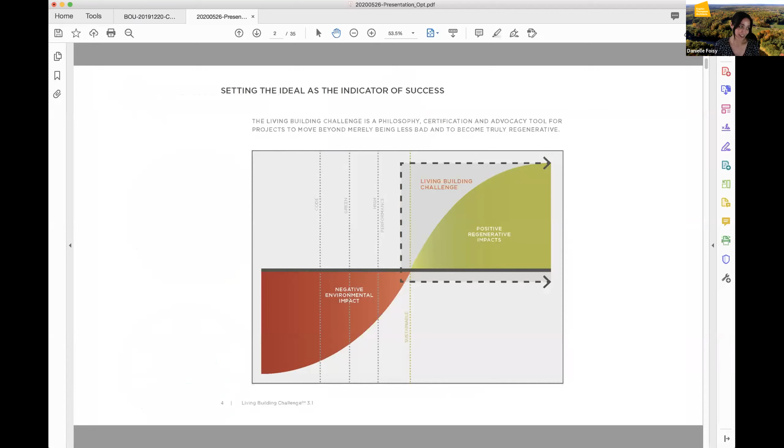The idea is to create an environment that has positive and regenerative impacts. As Drew mentioned, Living Building uses the metaphor of the flower as a goal for the built environment to achieve, since flowers are adapted to the climate, harvest their own energy, and are pretty to look at, which is a fitting metaphor for what we all want our buildings to look like.

There are 7 performance areas called petals that need to be achieved for certification, and within those, 20 imperatives. This includes 105% of the energy consumed by the buildings to be offset by on-site solar, and 100% of water needs to be managed on site, which in our case was relatively easy because the school is on a well.

The material petal requires the use of non-toxic and low impact materials, which includes no PVC and all FSC wood products, even the glue lams and structural sheathing. It's really trying to fundamentally change the materials we work with. Some of the chemicals not allowed in LBC buildings, such as PVC, are known pollutants to the environment, harm construction and factory workers, and are known human carcinogens.

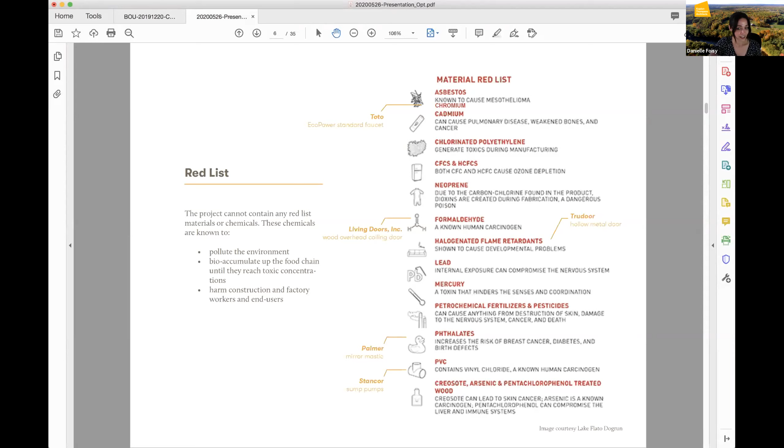Some of the petals are performance-based calculations and are a bit more objective, such as energy, whereas others are a bit more abstract, such as the health and happiness petal.

For health and happiness, the project must intentionally integrate biophilic elements into the design, meaning incorporating ideas such as what does the building sound like, what does it feel like, and how does it change through the seasons, in order to make the built environment more enjoyable to be in and less sterile, because we spend so much of our time indoors instead of outdoors.

Part of this involved an on-site charrette where the Ecology School, the design team, educators, and the farmer got together and brainstormed how to incorporate some of these elements into the design. Here's an example of some of the sketches produced that day. Our goal was to go for quantity, and even if only a few of the ideas stuck, it would be a better building because of it.

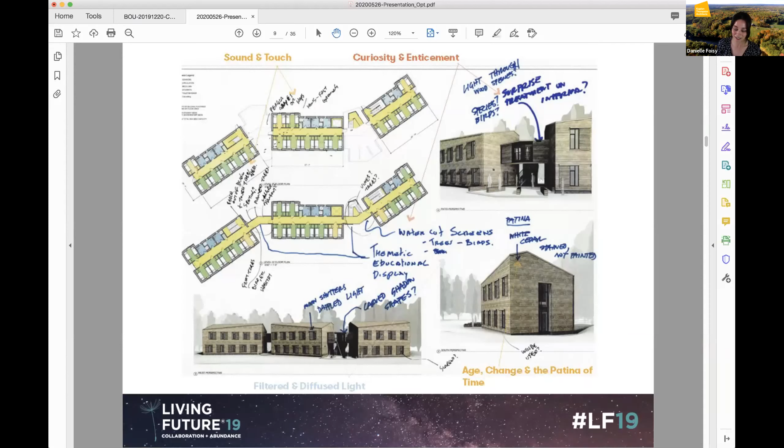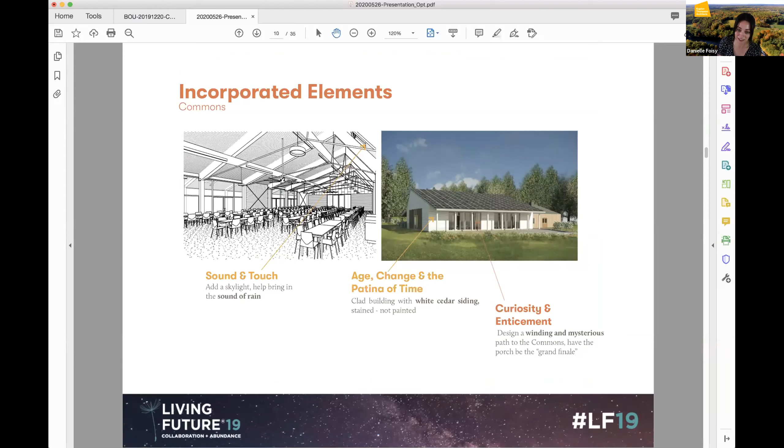One of the elements incorporated was skylights in the commons to help bring in the sound of rain, and a cutout in the overhang of the commons where you could see the solar panels on the roof above, which would allow for some filtered and diffused lighting as you walked underneath, and also showcase the energy system.

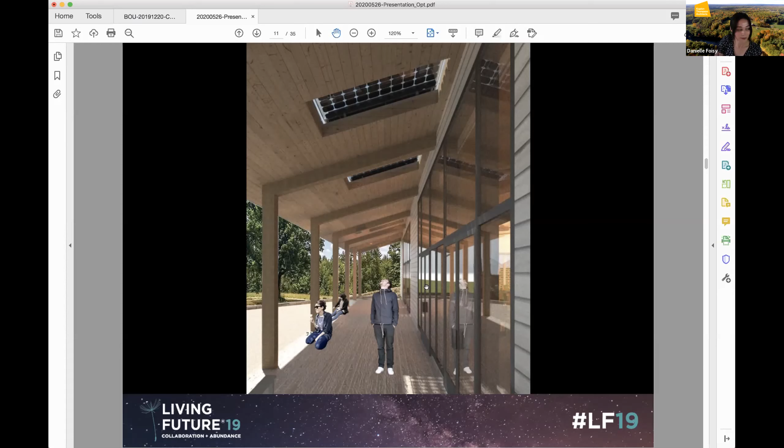Overall, the goal of Living Building is to have a holistic view of the building and construction process, to improve the quality of life not only of those who occupy the final building product, but those who work in factories that produce the building materials, those who construct with those materials, and the surrounding neighbors who benefit from having a living community as an educational hub in their neighborhood.

We want to set an example of how sustainable living can be achieved, and we're really excited that the Ecology School has taken on this tremendous task of being the first living community compliant master plan ever. It's a fabulous project to work on and have right in our backyards.

So I'll pass it off to Ryan and Chris at Scott Simons and Briburn to talk about the buildings that we're about to see on site.

But just to give an idea of where the Ecology School is, it's in Saco, along the Saco River. Their original location that they were renting was on Ferry Beach.

This is the site pre-construction. As Drew mentioned, this is the entire 100-ish acres owned by the Ecology School, of which the darker brown 96 acres is under a conservation easement with the Maine Farmland Trust. The living community boundary is restricted to the white dashed line, which is basically the developable area.

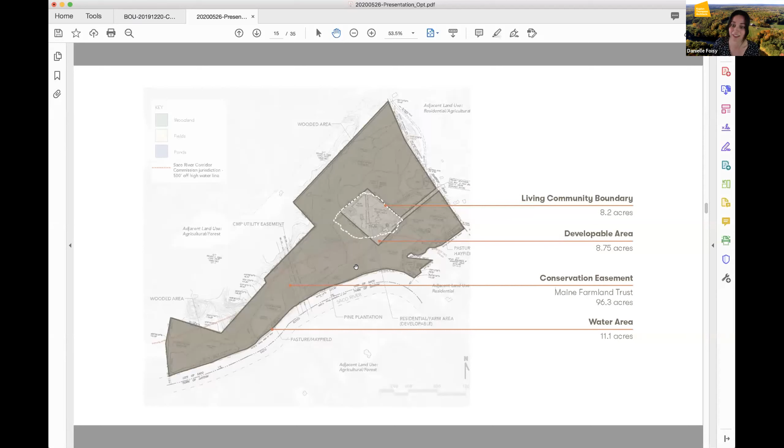And I'll let Chris and Ryan take it away about the actual design.

Yeah, Ryan, are you taking this part? Or do you have control over the slides, Ryan? I was trying to flip through the videos here. Just give me a second.

Hi everyone, Ryan Kanteres with Scott Simons Architects. This picture is actually picking up with the Richardson Associates site plan. The site plan was a collaborative team effort involving all of the design firms. I really just wanted to take a moment here to orient everyone before we go out in the field, to understand some of the decisions and directions that led to the location and siting of buildings and the utilization of the site as it was.

And this is just a sidebar that I wanted to mention.

The stated mission of Living Building Challenge being a market-changing effort, it occurred to me that this project has had some really direct aspects with that. I think we took an approach with the design of trying to source local materials to the greatest extent possible and using bio-based materials to the greatest extent possible. It actually directly led to prefabricated walls being able to be FSC sourced.

To zoom back out, the orienting piece here, you can see in the next few slides the existing buildings and the new buildings in this overall site plan, plus all the way to the left, the future supplemental residence facilities. But the largest building is the Commons building, and the segmented building is the dorms up towards the north part of the site.

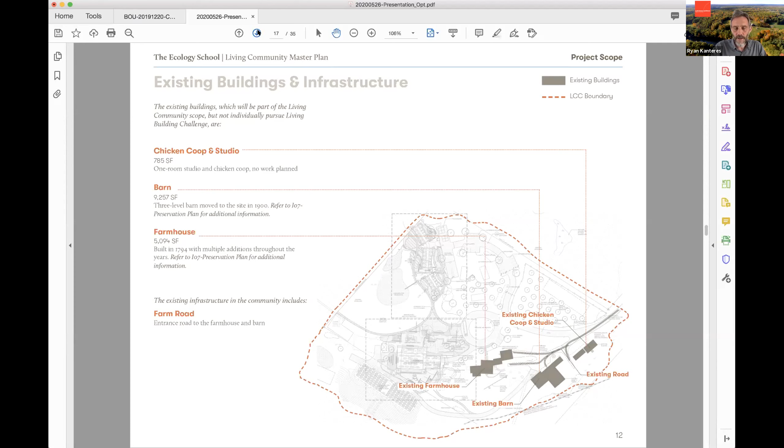That really became an identification of place and site and a design driver when we get into the commons. If we go to the next page, you'll see the new buildings highlighted. One thing that's a little hard to see here is that there's a historic wind row that runs perpendicularly almost about the middle of the boundary of this development area, which divides it from the existing historic farmyard to the new development portion of the farmyard.

And Chris, I think if you want to switch over and talk a bit about location of the dorm and the sequence of experience of the new portion, that would be terrific. Sure. Yeah, it's very similar in the process to locating the commons as you talked about. It was a real digging into the site and figuring out what worked best for the school.

When we first started thinking, all of us together, about the dorms, our immediate impulse was to work with the sun and orient ourselves perfectly south to take advantage of solar orientation. But we learned we were going to be using the commons as the big power building with solar panels, and the rest would be on an array, and the students wouldn't really occupy the buildings during the middle of the day. They'd be out in the field almost all the time.

So solar became less of a driver than the volumetric shapes of the dorms. We all collectively loved tucking those buildings into that wind row and preserving the agricultural space in front, actually having a divided form of three different buildings, which works with the program for the ecology school. They have different varying sizes of groups that come and go, and they can divide them up accordingly and easily.

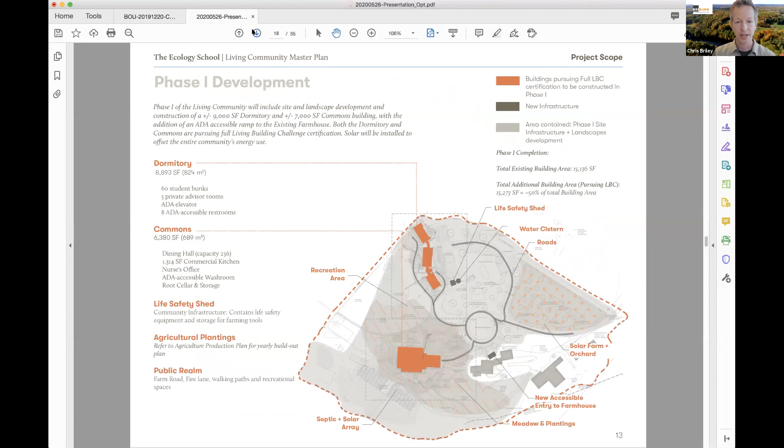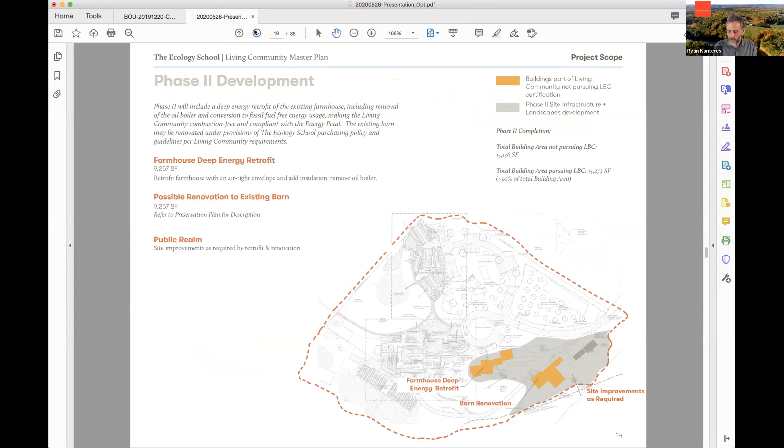That's pretty much all I have on that. Back to you, Ryan. Or are we going to the field at this point? I think that the purpose was to help orient everyone, and I just wanted to point out the direction and decision about the form of the building.

It is sort of interesting - we're working with rather traditional forms, but for the commons perspective, it's a salt box, but inverted, because the low slope, instead of shielding north wind, becomes an ideal collection location, which we'll get into in more detail.

And let me see if I can, Naomi, why don't I put it up to you really briefly, and then we can connect with John and Adam.

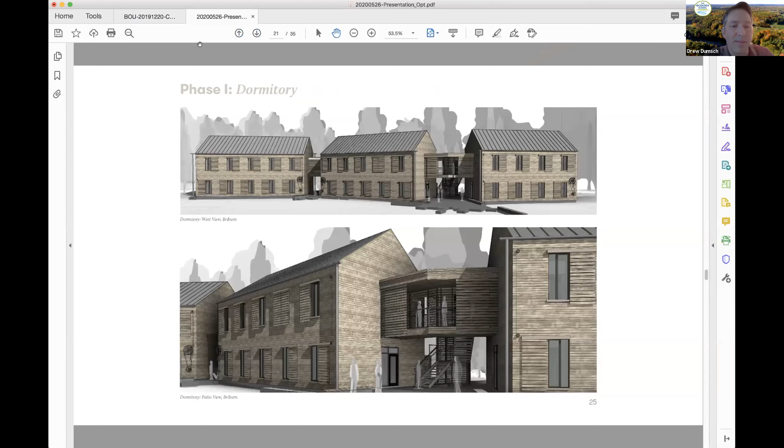I do want to just mention, in seeing those pictures of both the dorm and the dining hall—and you'll see this as Adam, Ruthie, our project manager from Zachau Construction—that with the dorm there, the windows are just these huge, massive, almost picture windows that look out. There's forest on both sides of the dorms. And then the shape of the dining commons itself references some of the shape of the farmhouse, whereas the dorm references more of the shape and the look of the barns themselves. So they fit right into the landscape.

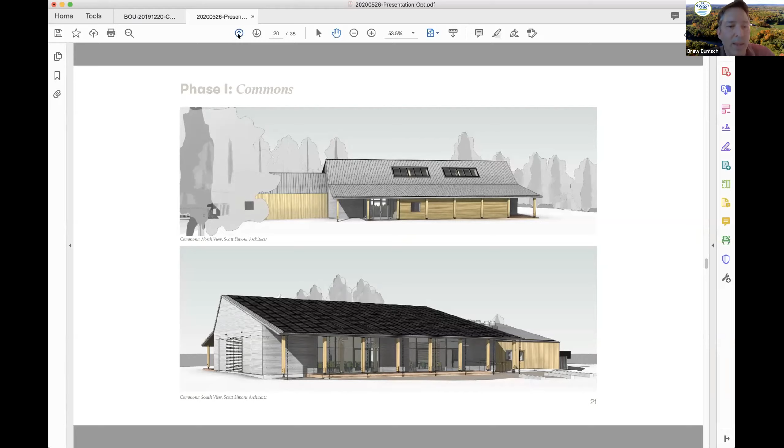We're going to start the tour with Adam standing at the top of the hill overlooking the Saco River. The farmhouse itself has an incredible porch with this amazing view where you just sit and look down on the Saco River. Our property has a half a mile of frontage on the Saco River, so the river itself is a big defining part of the property.

In fact, I remember the first time we had all the architects out—I think there were 9 or 10 architects all walking around the property with me and some of the other Ecology School staff—it may have been Jesse Thompson who mentioned that because of the topography of Riverbend Farm, you go 100 feet and you're either going up or down. It's very hilly and there's ravines. I think Jesse said you go 100 feet at Riverbend Farm and it's a whole new site. So there's so many different view sheds.

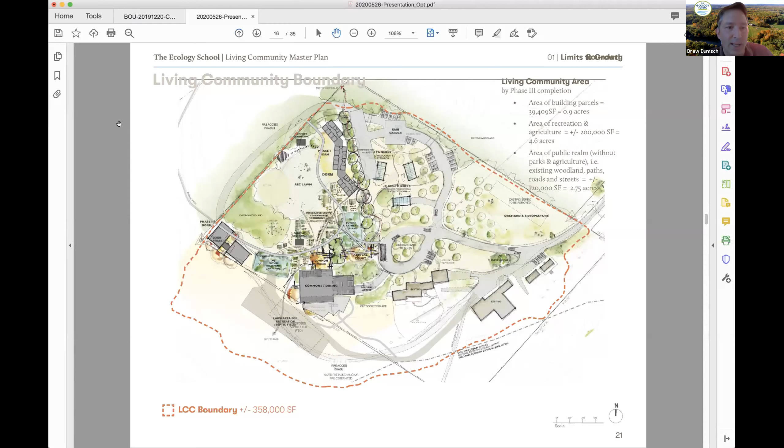I think both Briburn and Scott Simons have done such an amazing job placing those buildings. I don't know if you can point to where the dining commons and where the dorm is going to be on that overhead view. Basically, if you're looking at the farmhouse, right there is where the dining commons is going to be, and then the dorm is tucked up against those trees in the back.

We've got some incredible trees on site—right in front of the farmhouse is an old sugar maple, and we've got a white ash in front of it. So really, the architects designed right around the campus. Every tree—there's been minimal cutting of any trees on site. It's been really designing right around the farm campus itself.

If you're looking at that, there's a road more to the right of the picture that leads down to the lower production fields, which I think I mentioned our farmer was tilling just yesterday. So a lot of fields and a lot of amazing forests.

Well Drew, thank you. I think it looks like they're ready out on site, so why don't we swap the view over to Adam out on site.

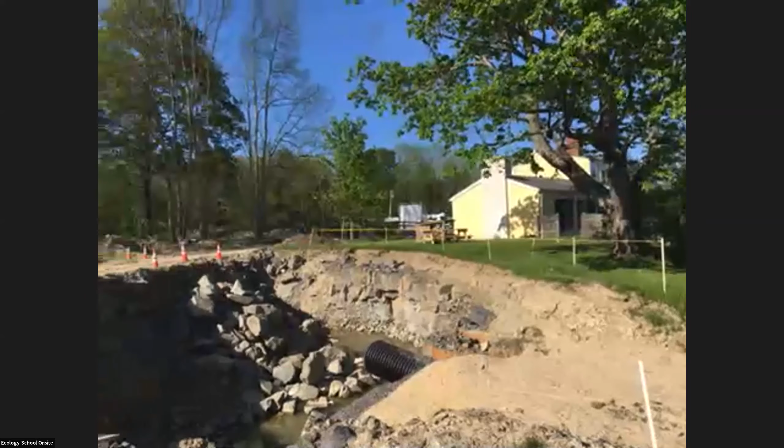As we come up here, you can see one of the petals is water resources, having a net positive amount of water, recharging the system, and this is part of that process. So it's a giant retention pond. We over-excavate it, that gets filled with a number of different substrates, soils and drainage materials, then capped with specific landscape plantings that allow water to infiltrate through and track through the whole site, essentially recharging the groundwater.

And then this is the old farmhouse, or part of it. You might be able to see Drew in there — he could stick his hand out the window and wave.

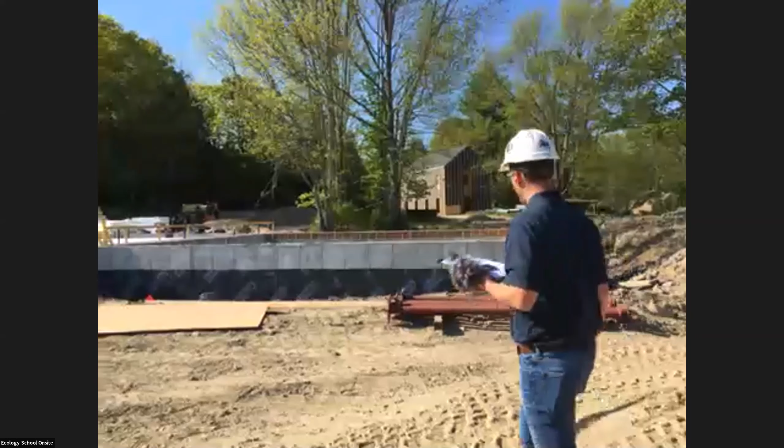Over here is the commons. We're a little further behind here. You can see the dorms in the background. We've got the kitchen here, and we've got a waterproof membrane. One of the interesting aspects of the living building challenge with all the material selections is we have lots of products that are compliant and a lot that aren't. This process is figuring out what we can use — essentially what the best, most environmentally friendly product is.

With this, anything that's sticky is usually a challenge. There's a lot of stickiness in this bituthene, the Grace product, from the primers to the different adhesives and sealants, to that specific membrane, as well as the drainage board. Some of those are better than others, and some manufacturers have better products than others, not necessarily their full suite. So it's been a challenge navigating that, where one manufacturer has one item that's good and another has another that's good, but they don't mix together. Anyway, we've landed with the Grace product here.

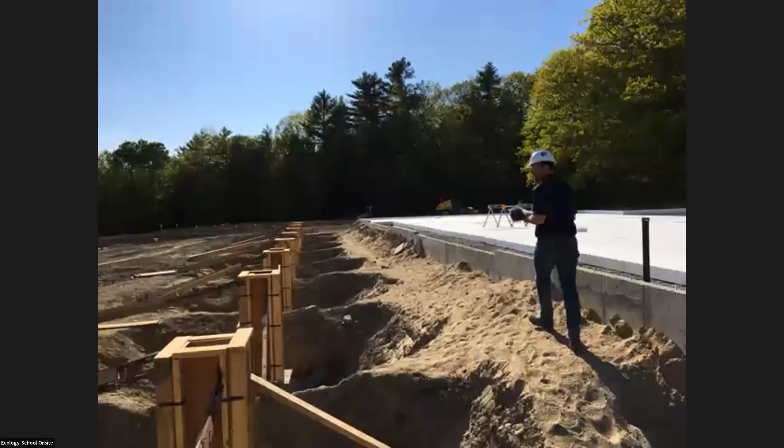If we wander a little further afield, you can see what will be the porch to the commons. This has a great view of the Saco River — I don't know if you can see it in this footage. You'll be able to see the yellow iron, but maybe not the actual river.

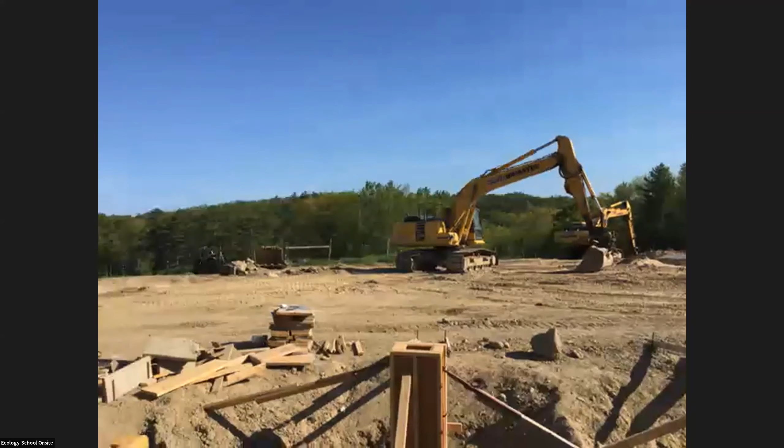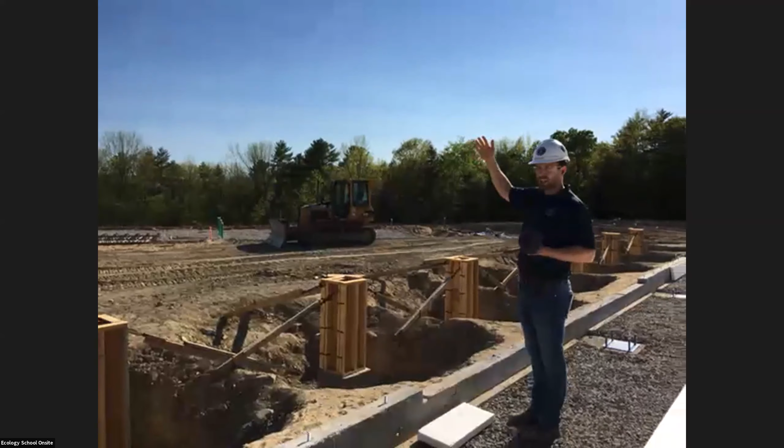But the intention here is you'll be able to sit out, have a coffee or breakfast or any of your meals overlooking the water. And as Danielle said, there are a few punches in the porch roof, so you'll see the solar panels, and they'll be translucent, so you can look up through there.

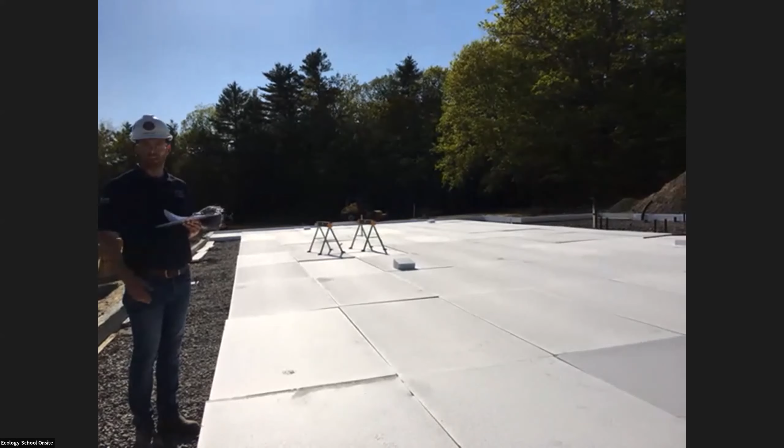In the commons themselves, we're getting ready to do the slab, so this is part of the underslab insulation. We're using EPS, which still has some challenges from an environmental perspective, but it's much, much better than the blue board or pink board you're normally used to — the XPS or other products which have really bad blowing agents in them.

One of the options we originally had was Glavel, which was pretty cost prohibitive — you're shipping it a long way. This ended up being the better product.

Could you explain what Glavel is? Glavel is like a foam glass kind of gravel — a foam glass material that's used instead of other insulation. Obviously the underslab or foundation insulation gets wet, so you need something that will stand up to those rigors. So you're a little limited until they come up with a compressed wood fiber board that can't rot underground.

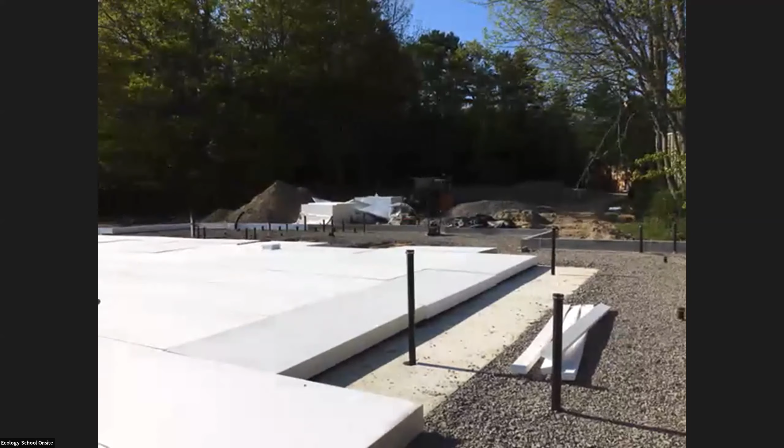So this stretches across — we've got a few spread footers, that's what's going in here. You can start to see some little sprinklings of cast iron pipe. So this would be the serving area, and the kitchen's behind us.

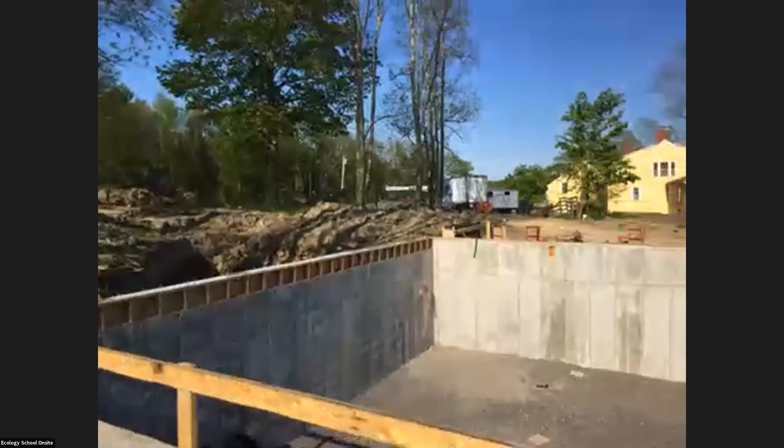And then the commons bathroom is over here.

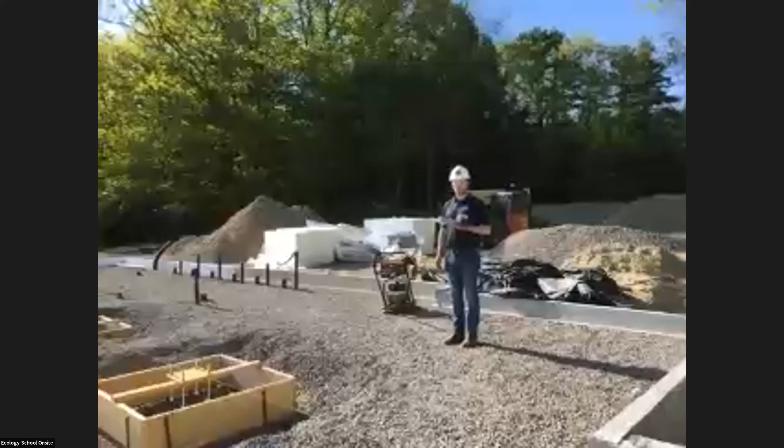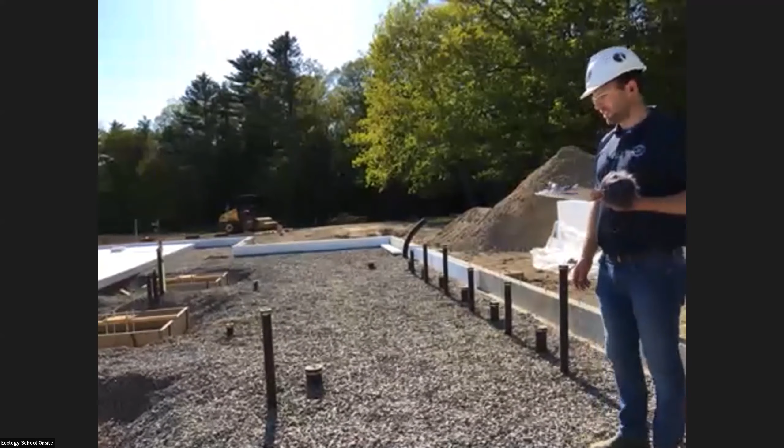One of the materials that's really toxic in production is PVC, so we can't use any PVC on site. We've got cast iron for all the drain and waste pipe work instead. It's a little more challenging to put in, but one benefit is you won't hear any noise in the walls—no dripping sound hitting the pipe like you get with PVC. It has really good sound deadening properties, so it's one of those unique spin-offs that has a net positive for the project.

And if we spin up here, you can see the dorms coming into view.

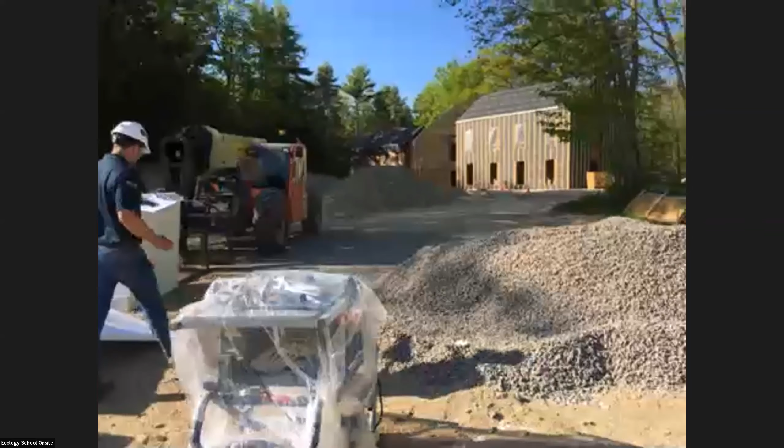One of the other major challenges on this project is recycling and waste mitigation as part of the Living Building Challenge process. I think 99% of all the waste we produce has to be recycled—only 1% can actually go into the waste stream. To put that in perspective, if we get one of the big 30-yard dumpsters, and we have 100 on this project, only one of those can be all the various plastic waste, packaging and other stuff, which is very challenging. So the designers have eliminated a lot of that problem by not selecting carpets or other products that are inherently more wasteful.

We're left with wood, and that can be recycled, so we send that off—it essentially gets burned at a biomass facility. Ceiling tiles can get recycled, drywall can get recycled, a lot of these other products can get recycled. All the steel and wiring too, and some gets reused—some things we've salvaged from other projects.

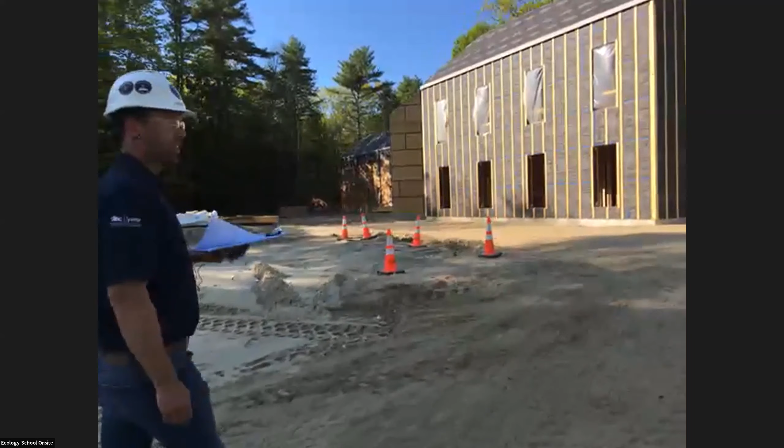So we've got a shed for the agricultural building that we bought completely used—it was an old horse barn. That's one of the other benefits, there's a lot of savings in that. It would be more expensive for us to build it, and it's a beautiful little shed.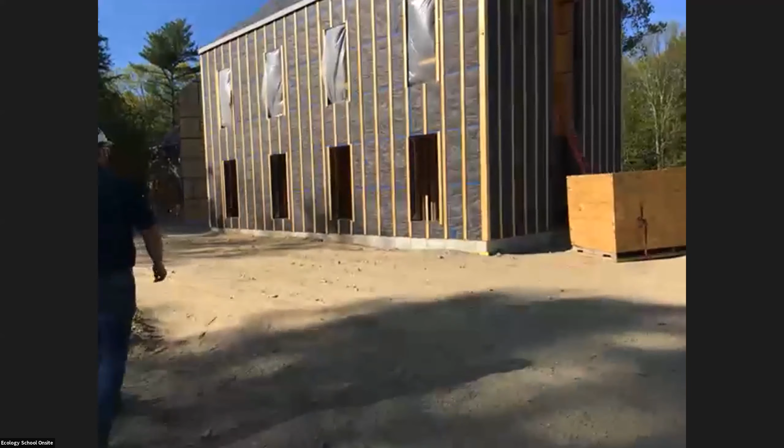As we come up onto this building, I think Oliver's on the line, so he can give you a bit more technical information on this.

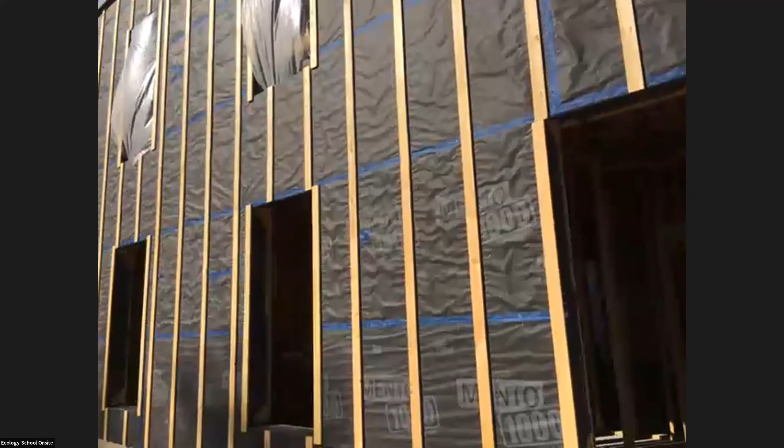WRB—so we've got the Mento wrap with Tescon Vana tape, and on the exterior barrier it provides a really fantastic vapor-open system. It allows all the vapor to escape while eliminating any water ingress into the building. And then we've also got it strapped, so all the siding will sit off the wall, providing a ventilation channel behind it so it has a chance to dry out.

Adam, do you want to let Oliver give a little bit of background about this material? Sure.

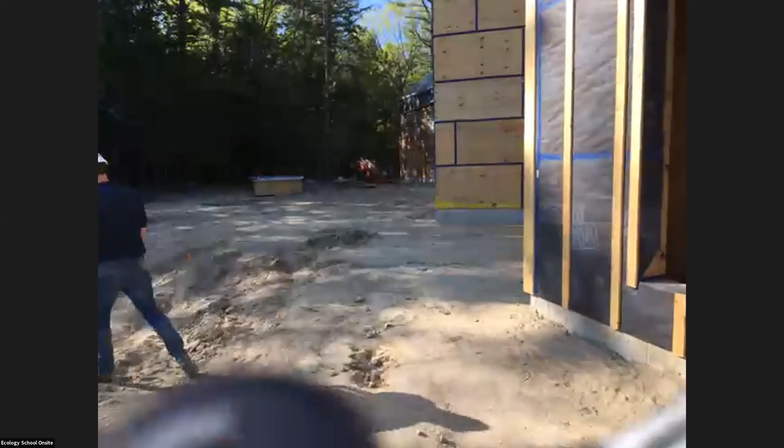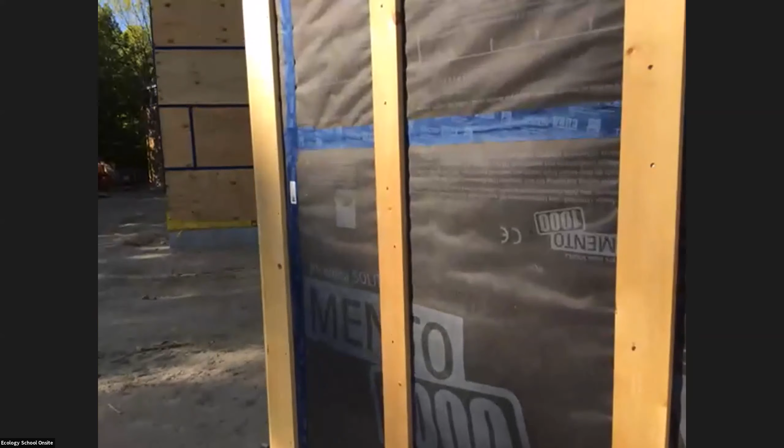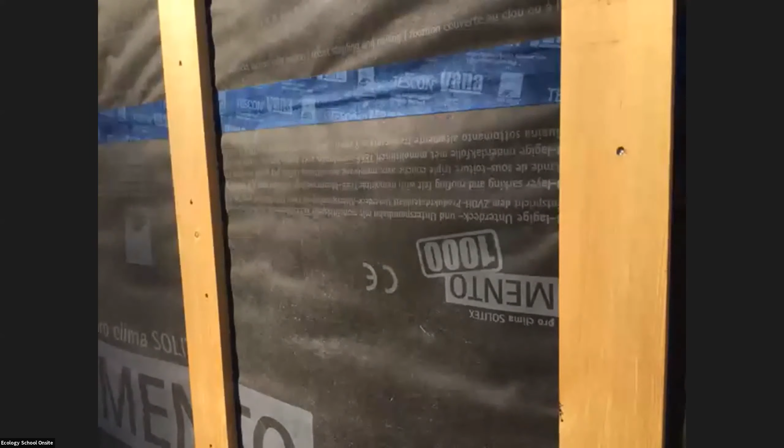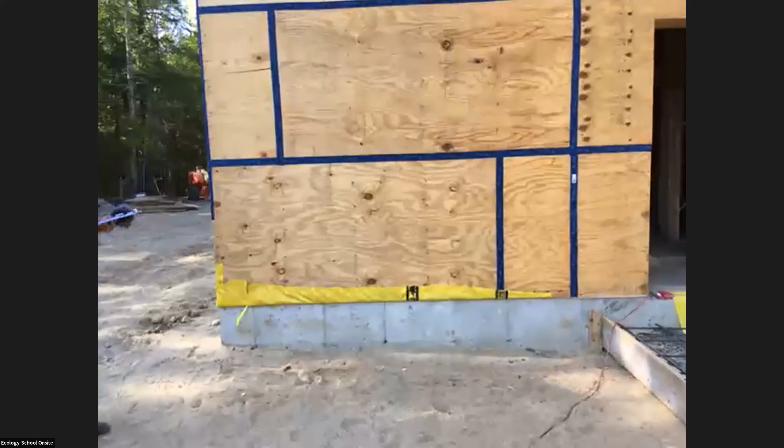Yeah, there's not much to say here at this point—he said it well. Mento 1000 on the outside as the weather barrier, and it's not a conventional one. It's a very high performance weather barrier, a monolithic membrane, not microporous, and that gives this project really high performance weather protection, in addition to a very high level of air tightness and very reliable vapor control. So you get that energy efficiency, the durability, and of course it's going to play a big role in the health and comfort of the buildings as well.

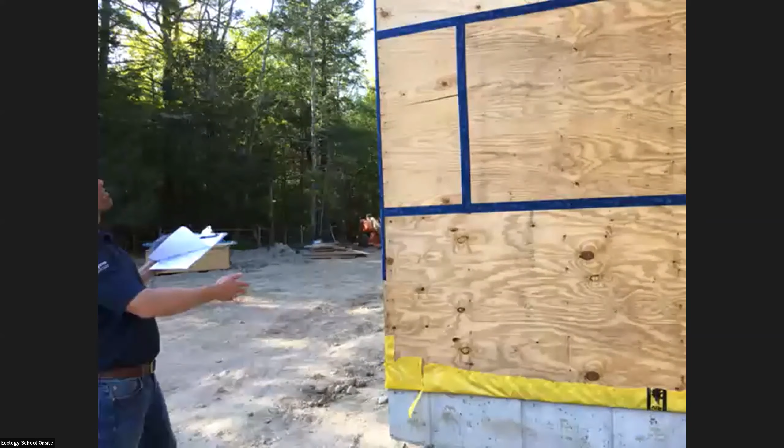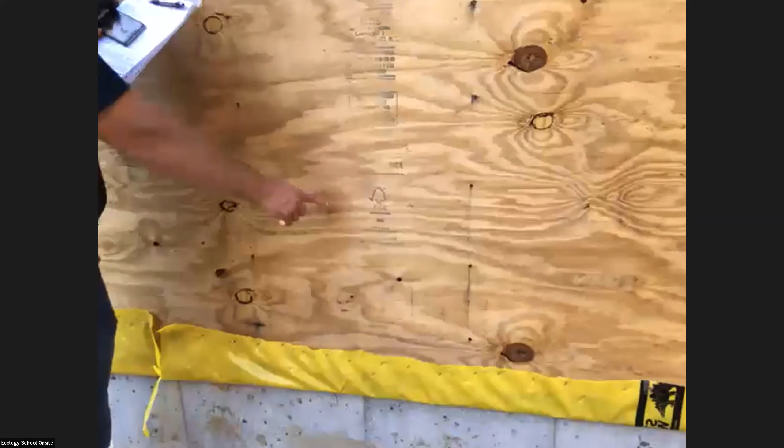Part of our sequence here is we've got very simple structures, so they're very easy to wrap, insulate, and provide that complete barrier. Underneath there's Stego, essentially a plastic wrap that goes under the entire slab. It wraps up onto the side of the framing, and this gets taped to the plywood, which again you can see is FSC. Then all the seams of the plywood get taped, and we still put the Mento wrap on top of that and tape all of those seams too. This gets wrapped up onto the roof, and then the whole roof gets wrapped as well, so there are multiple layers of that air barrier and vapor control.

So we can roll inside and have a look at some of these wall assemblies.

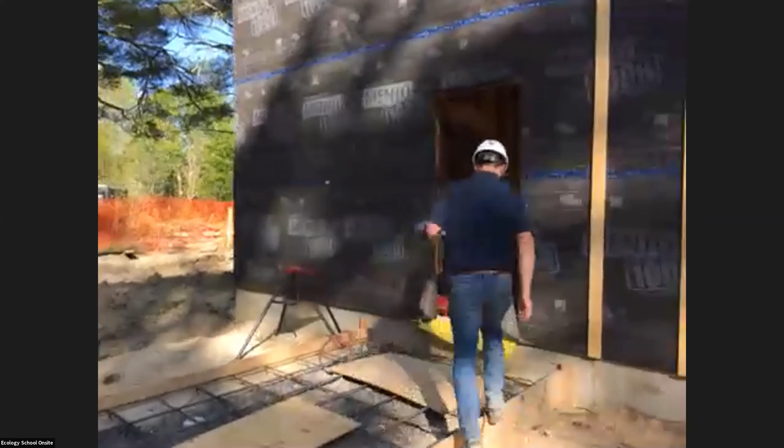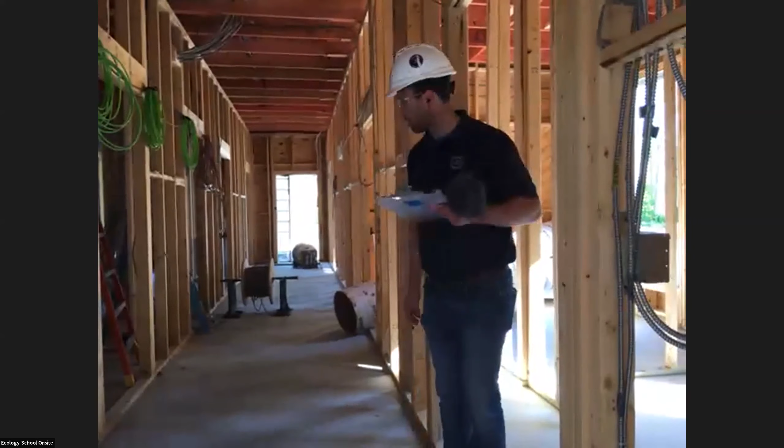So this is one of the dorm modules. You've got a central common corridor, with bathrooms on this side, and bunk rooms on each side. Right when you walk in, there's a walk-off mat, which is what this little depression is. We'll pop these 2x out and eventually put that in. This floor will be the finished floor.

On the second floor, it gets a 2-inch concrete topping as well. And interestingly, the LBC has its challenges as well as its perks. One being that we struggle to get a lot of FSC products. They don't make a lot of finished flooring that's reasonably priced, and a number of other things that are just hard to source.

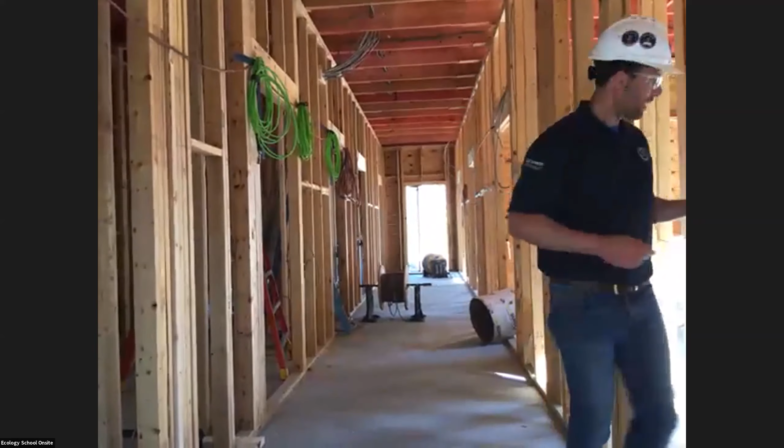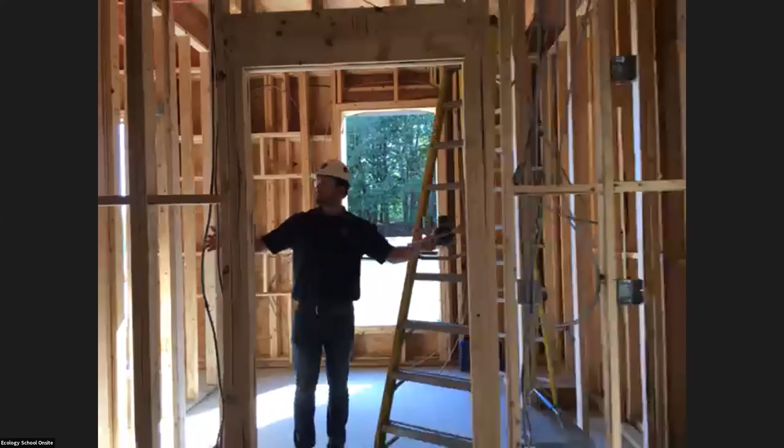In the actual dorm room, we've got two closets on each side, and then you walk in and there'll be 2 bunk beds on each end. And this was the window Drew was talking about. These giant windows let a lot of light in, with nice big tall ceilings.

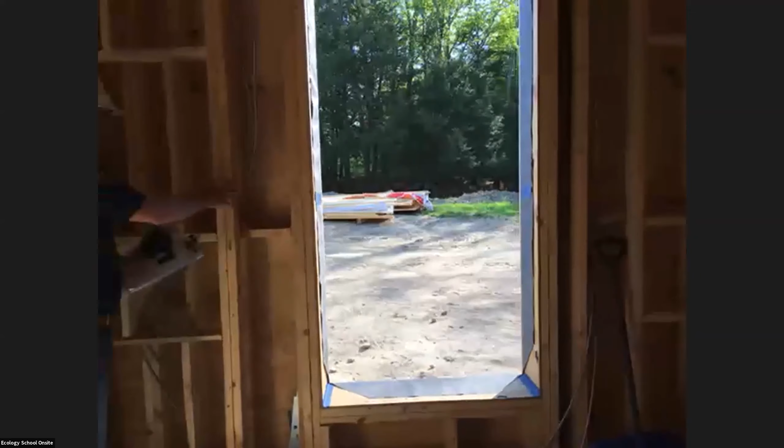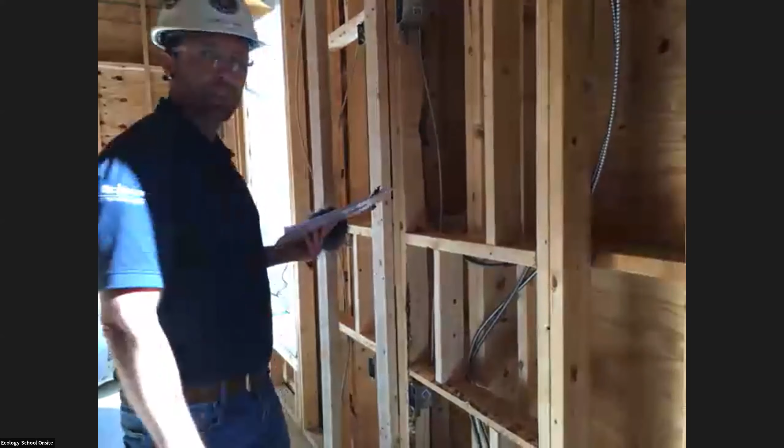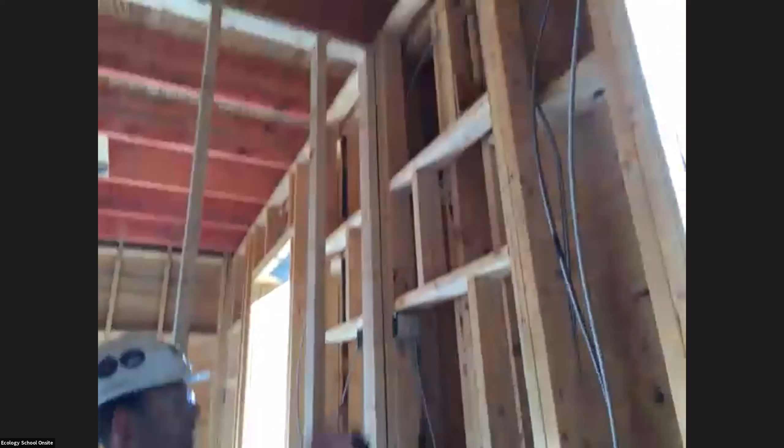The whole project has a double wall assembly, with an exterior 2x6 wall and an interior 2x4 wall. These ones in the dorms have little blockouts too - we're going to have some recessed shelving in there. There'll be one bed here where you put your phone, a book, your glasses, and then the second bunk will be up here, and there's another one. These will get filled with blown cellulose.

Another 475 product will be Intello Plus, applied to the inside, which is another reinforced vapor barrier so they can fill the cavity with blown cellulose.

In here we can get a little better view of some of the plumbing. Again, the same cast iron that goes all the way up through.

So I believe to date we've submitted about 1,000 products to Kaplan Thompson and the materials researcher, and I probably have about 600 that are approved. So this whole iterative material selection process is pretty time consuming.

There's a lot of products that either definitely don't make the standard, maybe some that you think make the standard and then don't, and others where there's declare statements and other elements that are previously approved, so you know they comply. That's been quite a challenge on the construction side - really dialing in what is and isn't compliant and what we can and can't use. Sometimes it's been right down to the wire with certain things, and others we've had to go beyond and outside the scope of what was originally planned in sourcing something that everyone thought may have been approved.

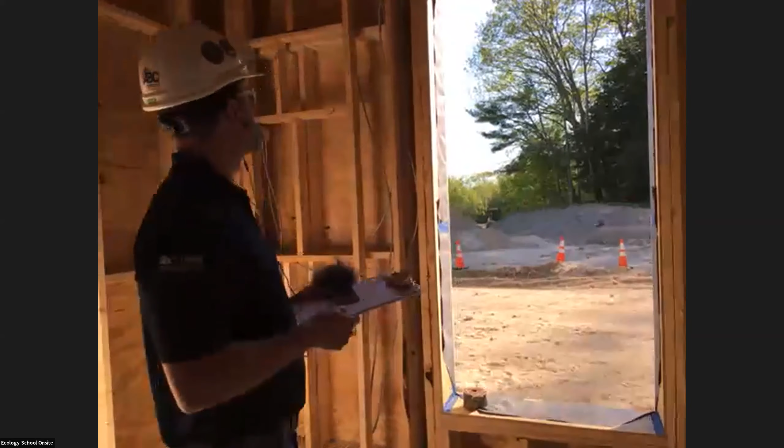Hey Adam, could I just talk a little bit about the choices we made in the wall panels? It ended up being kind of how we pandemic-proofed some of our supply chain. Initially, the wall panels bid looked like it might be going to an out of state firm, but I had already been meeting with Kevin Hancock and really liked the idea of sourcing within state. Part of the challenge was at that point, the Hancock panel shop wasn't comfortable with being able to fully execute the design. That showed where the design team was nimble enough to make just a few tweaks on the wall panel assembly, and then Hancock was comfortable with it. And actually the bid came in much lower.

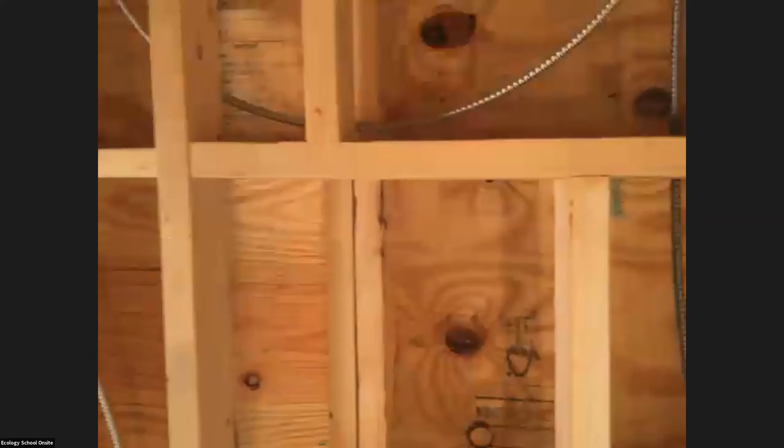Now we've got wall panels sourced with FSC Maine wood. You were saying, Adam, that you're familiar with some projects where you're waiting on materials from the West Coast or even China or Europe. Here we were waiting on panels from just a few towns over. That really was a great example of how the Living Building Challenge and its focus on sourcing local materials made it somewhat pandemic-proof in terms of supply chain.

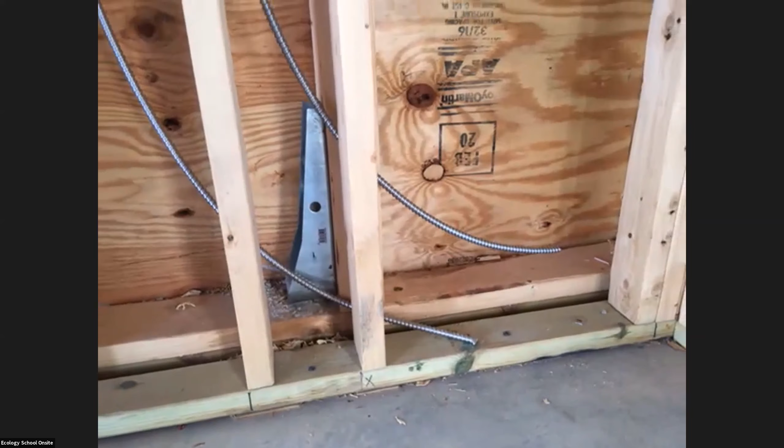Expanding on that a little, it also simplified the whole process because Hancock wasn't able to do some of the really complicated wall assemblies. They basically showed up with two different walls, like the exterior and the interior, and we just placed both of those, as opposed to the whole thing being a sandwich that shows up that you're then struggling to get in and install some of these structural elements. So on the construction side, it helped us, and as Drew mentioned, it supported a local company, and because they were able to supply everything really quickly, it also pandemic-proofed this project to that degree.

Adam, I wonder if we could maybe take a couple questions. There's a couple questions that have come up. I think Meredith has her eye on those that are specific to the site. Yeah, certainly. Or Meredith, go ahead.

So one of the attendees, there's clearly some passive house people, and they want to know, as you talked about many air barriers, which is your primary air barrier? Do you have a primary air barrier? I could answer that if you wanted. Go ahead.

We've got the opportunity to have many air barriers. You can have as many as you want, and each one is better and better because we're trying to keep the envelope tight, but controlling the moisture migration through the assembly is the important part. Adam pointed out that on the inside is going to get an Intello wrap, which is a vapor variable profile, and Oliver could probably talk your ear off about that too if you want.

Essentially, what it's going to do is allow water vapor—when it gets wet, it's going to seal up and keep that humidity from entering the assembly, and then when it dries, it's going to open up and allow it to escape if it did get inside. So that's our vapor control layer.

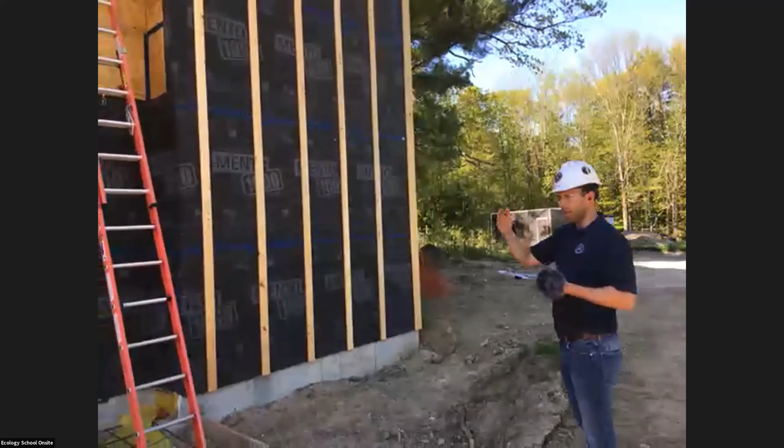With concrete, the additives—the admixtures—get really technical, and there's some that have some really nasty stuff in them and some that don't. I don't actually recall the specific products we used for that, but even things along the lines of the form oil that prevents the concrete from sticking to the formwork, we use an orange-based product.

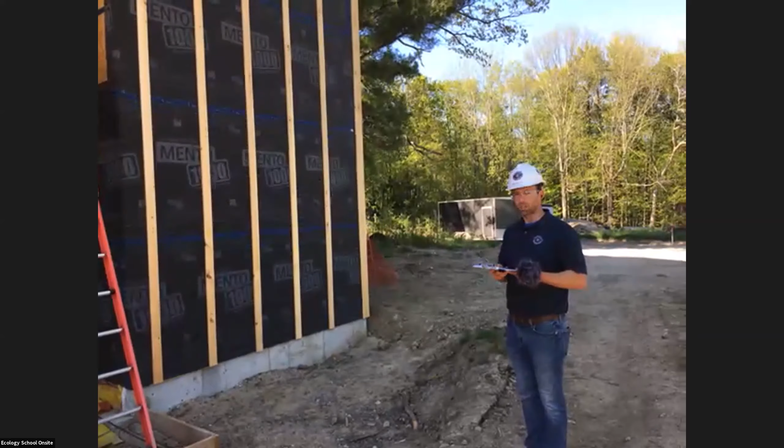And the other sticky stuff—all the sealants, all the glues—like Titebond wood glue is okay, but there are other construction adhesives that aren't. All of what we pointed out in the Commons basement, that Grace product you use to waterproof something, there's just things that off-gas and are generally not compliant.

Of all the different products out there, there's a very, very small percentage that we can use. So part of the challenge is usually figuring out what those are. Right now, the Living Building Challenge is still relatively new—I think there might be about 25 different projects in the world that have their certification.

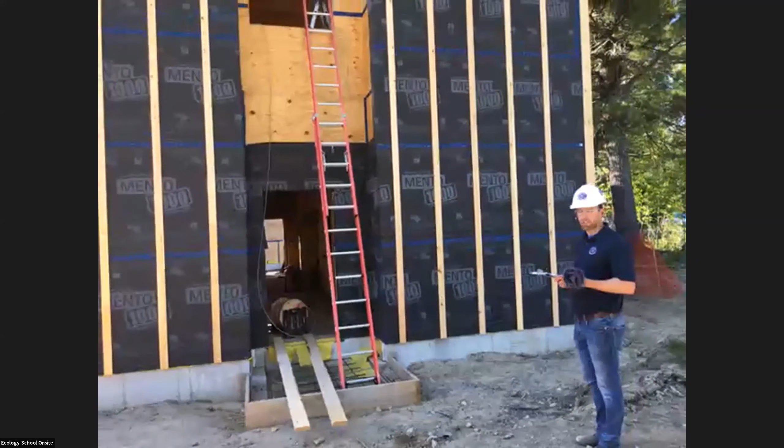So this database, which isn't open source but is somewhat available, doesn't have a lot of things on it, just by nature of only having 25 other projects. So one of the big cost drivers at this stage in the LBC certification is just going through and vetting all of these different products.

If I might add one comment: with Proclima products that we represent at 475, you're not having to make a choice between high performance and health—you can have both. And with the Tescon Vana tape, which performs as exceptionally airtight and has exceptional durability, it is also red list free, and has actually achieved the Declare label. That makes it easy to achieve high performance for these Living Building Challenge projects.

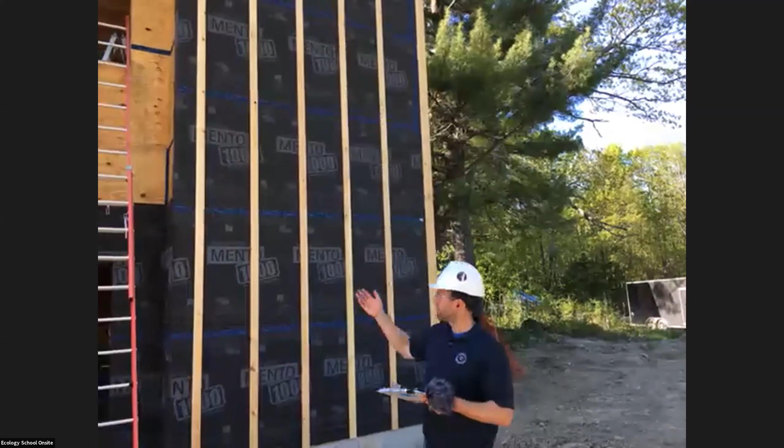Thanks, Oliver. You'll notice a lot of buildings now have a greener hue to the plywood, and we can't use that because it does not comply. So that's where a lot of 475 products are. They're great to work with, great for the environment, great for the people using them, so they're not slathering themselves in some of these chemicals.

So do we have any more questions? There's been a question about how the subcontractors have responded to the living building challenge. That's a good one, from Kathleen Smith at International Living Future Institute.

Great question, Kathleen. The contractors have been really good. I think it's kind of a self-fulfilling sequence, because the contractors that aren't good, or that we struggle with and who don't do their submittals or their legwork and aren't good on the paperwork side, they didn't want anything to do with this project, and we didn't want them to have anything to do with it either. So what we're left with is some of the best subcontractors in our pool, and they have the capability to manage this, the patience to go through a lot of these iterations when we send constant feedback that says, you can't use that product, find a different one, think outside the box, what can we do for this? So they've been really great.

By and large, they're all really interested in it and really appreciate the process and the meaning behind it. I think the big selling point that works for everyone is that the construction industry is both very wasteful and very toxic, with all the stuff we're exposed to, cutting and smearing and slathering and everything else. So just the fact that there are less nasty chemicals that these guys and girls are wearing and bringing home with them, I think everyone's appreciative of that.

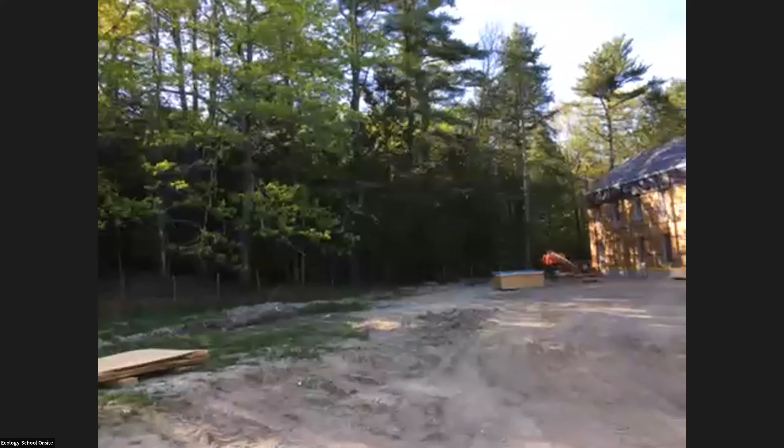Naomi, can I do a little bit about landscaping, just real quick, because right now all you're seeing is a construction zone. But the idea of the campus itself, our lower fields along the river are going to be the production fields. Having a half acre of onions or potatoes isn't necessarily inspirational for most people. So surrounding the dormitories and the dining commons are going to be smaller scale permaculture education gardens, like 5 by 5, 10 by 10, where we'll be growing more food and herbs and wildflower pollinator gardens, a whole assortment of different landscaping that's beautiful but also very functional.

The idea there is that people can walk out of the dorm or the dining common and say, wow, that's awesome. I want to go home and do that in my backyard, or as a school project, or even behind my office. So once the building gets done and we have time this fall to start landscaping, that's really where we'll put our effort, surrounding the beautiful buildings with beautiful landscaping that's functional and ecological.

Awesome. That's great.

To thank the two of you for walking us through the site, you really have done an excellent job. Adam, you display with ease the degree to which you've had to learn the ins and outs of things at a depth of dive you don't often need to do. So I really think you've done a great job walking us through the project. And I really appreciate the opportunity to have a beautiful day and share the walkthrough with everybody here too.

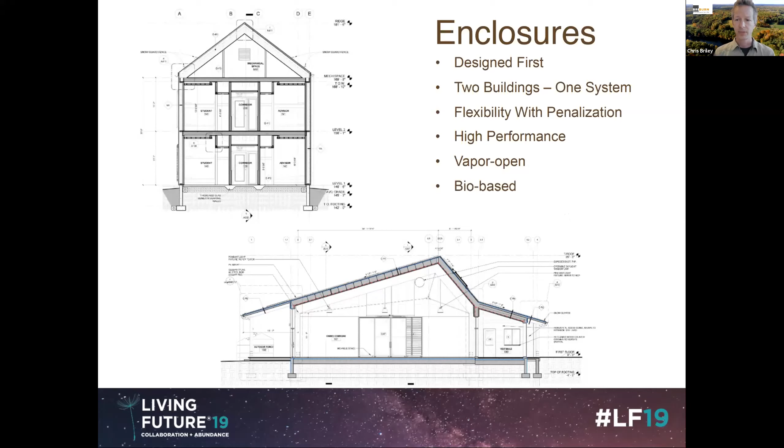And then once our energy demand is low enough, then it's really a factor of fine tuning that and finding out how much renewables we're going to need.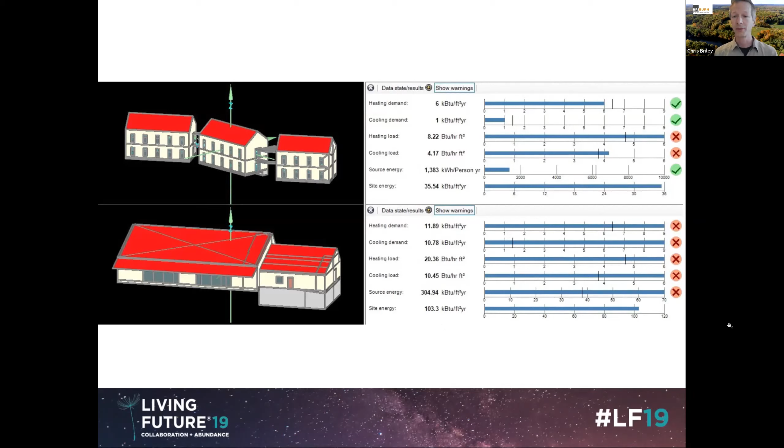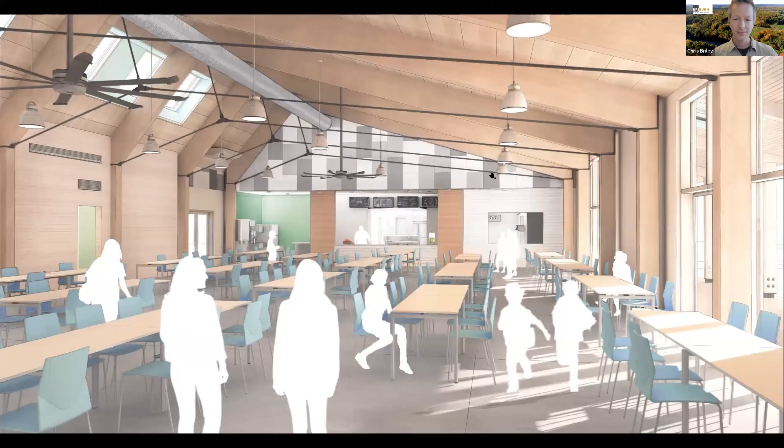I'll let you talk about that, Ryan. Well, the Commons building has two primary reasons why it is a significant energy user on site.

The regulatory environment in the state of Maine did not allow us to move to a fully alternative wastewater treatment system. We included valving and options to be able to switch over to that design if that time ever comes, but we had to produce a design based on simple, tried and true technology. Luckily, the idea of drawing water from a site and returning it to a site, if you meet all the quality requirements, traditional wastewater management practices are well within the bounds of what ILFI was looking for in the Living Building Challenge.

But the energy consumption of the Commons is driven largely by the fact that it's roughly a 200-person occupancy dining room. What's really remarkable about the dining commons for the Ecology School among Living Building Challenge schools is that they run a from-scratch cooking operation, creating three meals a day for all of those occupants. So there is a real prioritization of food and experience in education.

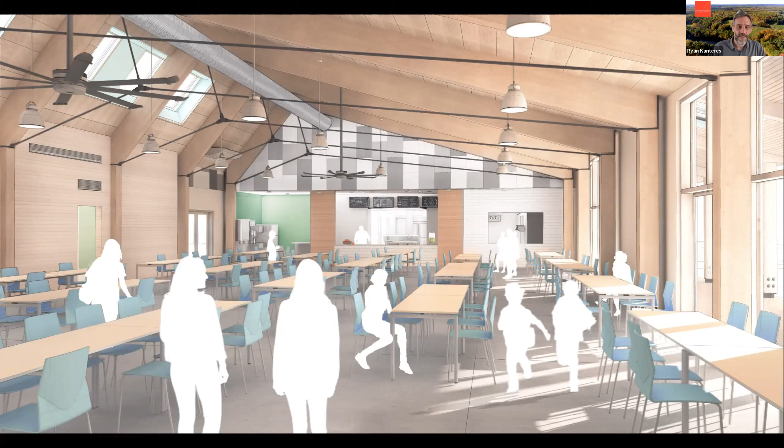And the chef really strongly believes in making all of the food from scratch. There's a major baking load. It's also keyed very much into the long-term plan with on-site agriculture to offset or supply a large percentage of the food used—the produce used in production. I shouldn't just say produce—actually, there are plans for chickens, eggs, and pigs down the line.

The energy consumption in the kitchen—this is actually an earlier design of the kitchen, if you were really paying attention to what was going on within the space. You really see this servery space in between the dining area and the kitchen, but it is a very intensely supplied kitchen. In order to do the energy calculations, we had to go through every single piece of equipment and what its energy consumption would be based on its amperage draw, its hours of operation, the actual temperature setting the ovens would be on.

It was down to that level of detail. There are some really interesting and exciting European technologies, like induction kettles and pieces like that.

There is no combustion in the current kitchen, so there's no gas whatsoever. It is a purely electric cooking kitchen. It made it complicated to go through each piece of equipment, but it made it easy to correlate it back to the energy demand and the offset that would come from the eventual PV arrays.

As I mentioned earlier, the south-facing porch was a big design driver for the dining room. The inversion of the salt box to create that large collection area was also part of the direction informing the design for the commons.

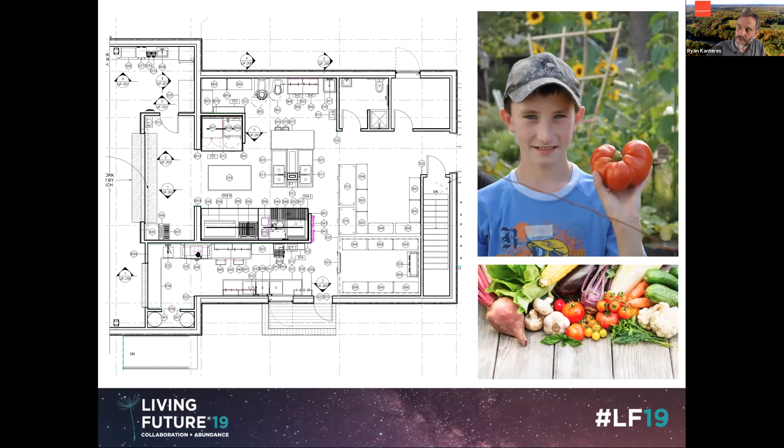It turns out the capacity of production is a reasonable offset, but a small portion of the overall on-site energy production. To give perspective on some of these individual decisions, as we get into requirements for kettles, convection ovens, and dishwashers in particular, we're able to do a side-by-side with the dorm and see the relative energy consumption of both projects.

One thing to remember is the bulk of the hot water is process energy. You should actually probably say all of it.

In the ventilation, we went through efforts to source efficient hoods and ventilation systems, but it's a balanced makeup air unit, and it does take a fair amount of energy to offset or pre-temper the air coming in to meet the exhaust on the full exhaust hoods.

I've done a fair amount of kitchens, but this was the most I ever had to get into it with the chef about how many hours a day are you using the oven, how many hours a day are you using this fixture, trying to work through the energy demand on that. It really came down to, bear in mind the amount of energy being consumed by the dorms, this one piece of equipment.

This is a conveyor-fed high temp dishwasher for the commons. The offset here is it does a good job, and it doesn't take a lot of staff to maintain and work this. So that is a real concern for operations within the school by and large.

But this single piece of equipment, roughly between the preheated hot water demand and the direct energy it uses to kick that water up, has like a 17 kW heater boosting element right inside the tank. It almost uses as much energy as the dorm with this one piece of equipment.

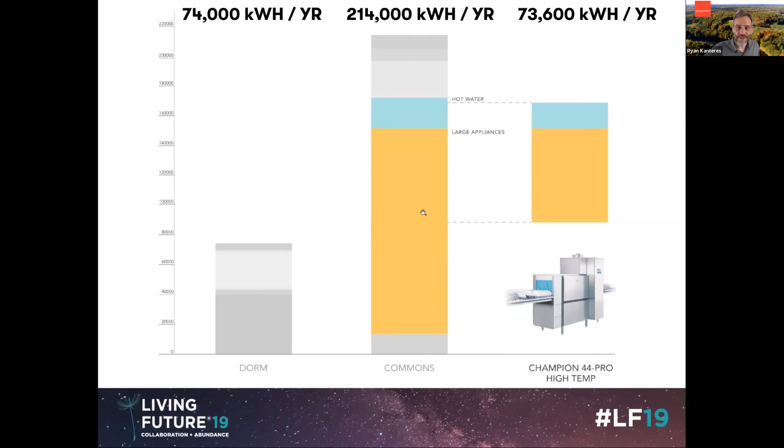So you really have to think about every decision to that level. This piece is very important to the commons going forward, and you can make the correlation on what the related PV is, just based on the overall percentage of energy consumption that goes back to that one piece of equipment.

We've had people say, well, you've got lots of kids, you can make them do the dishes. I remember when I was a kid at 4-H camp, we had to do the dishes. But nowadays, especially given the dynamics of the pandemic and health and human safety, we really need that high-end dishwasher, even if it's taking as much, if not more, electricity than the whole dorm.

You often talk about many of the students who come through having never had this experience of walking by the field and seeing the vegetables they're going to eat later that day, or seeing the eggs come from the chicken coop. So it's part of the education and experience that helps connect people to the program and the site.

Even the idea of kids eating family style meals in the dining hall, sitting down and passing around dishes, saying please and thank you, and helping to set and clear the table. I appreciate that you folks started calling it the dining commons instead of the dining hall, which is so much better, the idea of the commons, a New England ideal of people coming together and shared use. I love that idea of the dining commons.

Do you want to wrap up? I don't mean to rush you, but I want to make sure we have some chance for questions. We'll wrap it up. I was about to wrap it up.